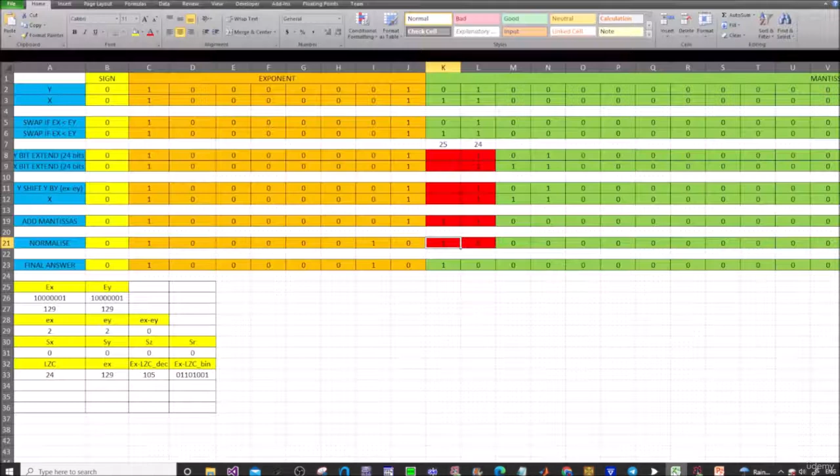So you'll note if you go into the resources section, you're going to find two files there. One of them is going to be an Excel spreadsheet. So you can go ahead and open that up just now, and you'll see it's simply the adder and subtractor. So if we get into the add subtract, you'll have seen this file before.

Now the other file in the resources section is a Logisim file, and it's going to have the circuit build for our adder. Now I had thought about building this up live in the videos, but having attempted it previously, it just takes far too long and you're not going to get all of the value out of it. So what I've decided to do is actually to build up the working model, and what we'll do now in this video is talk our way through it.

But first of all, let's go and we'll have a look at the Excel spreadsheet and we'll work out our little missing truth table. So let's use our old friends number 70 and number 5. And we can close this, so don't clear it, just press the close because we want to look at the data behind. So if we close that there, now what we're going to do is talk through the possibilities that we can have here, and I'll make it just a little bit bigger so we can see it a bit better.

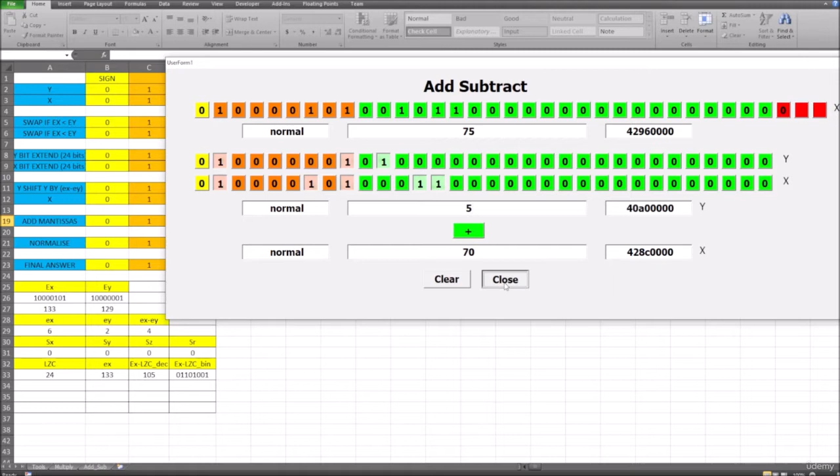So if we were to look at this example here, then we're going to have our value of 1 and 1 because both are normal numbers. But in this instance here, the value of our y is less than the value of our x. So it means that we're going to have to shift the value of y so that the exponents are the same.

So what we're going to do is we're going to take the value 1, 0, 1. In this instance here, it's going to be shifted to the right by this value here, which is our exponent difference. So that 1, 0, 1 is going to head off to 0, 0, 0, 0, and it will be 1, 0, 1. So it's shifted 4 places to the right.

So it means here in this instance that we're going to have a 0 there and a 1 there. And again, we're left with the two possibilities. Either we carry a 0 in from here, in which case that just remains as a 1, or we carry a 1 in from here, in which case we would have a 1 and a 1, and when we add those together, that would go to a value of 0, and we would carry a 1 through to the next value here.

So let's open up the Logisim file again. Now if you make sure you're on the top level here, you see that what we want to do is we want to add an input into here for X and also for Y, and also the add/subtract button. And we want the output to be the X plus Y. So if we head in here, you'll see that we've created the inputs here. So this is the input for Y, input for X. So I'll quickly show you these just so you can get started if you're building it yourself.

You can click on the input. We want to change that to a 32-bit input, and we'll face it east, and we're going to call that input X. So what we'll do is we'll put a tunnel. So here's your tunnel here, and we'll call that X, and we're facing it west, and we're going to make that a 32-bit tunnel, and we connect that onto here.

And now I've added a probe in the ones up here just so we can see it in hexadecimal as well. So there's your probe, and we'll face it east and make sure that the output is hexadecimal. We'll connect that up, and that's us created that X input. Now to create the Y input, you just Control C, Control V, and that's us now created a Y input. If we change this here to a Y, the label. Okay, so it means that you can quite quickly build up these little structures.

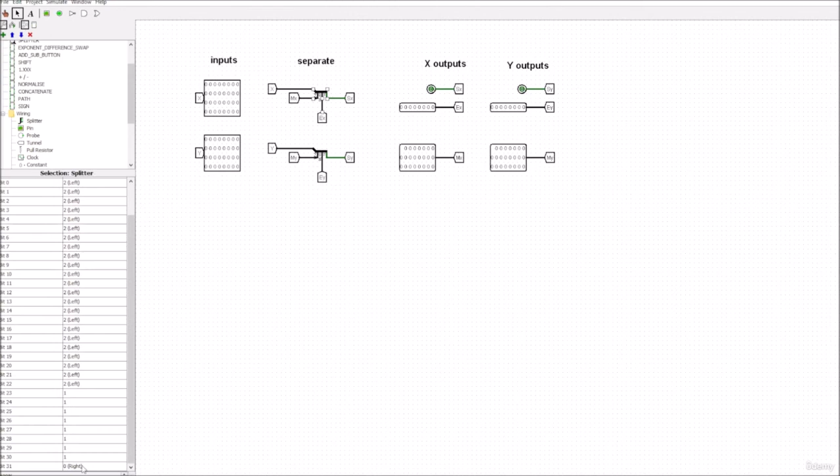And I can then change the values here, so they're the same as the values you have in this one here. So it means that the first lot here is 0 to 22, so that's the first 23 bits of the mantissa. The next prong here is going to be the middle one, the 8 for the exponent, and the last one is going to be the 31st bit, which is the sign. Okay, so that's how we split these things up. It's pretty straightforward. So if you like, we can think about the splitter as modelling lines 2 and 3 here. So in lines 2 and 3, we split the y value into sign, exponent, mantissa, and we split the x value into sign, exponent, and mantissa.

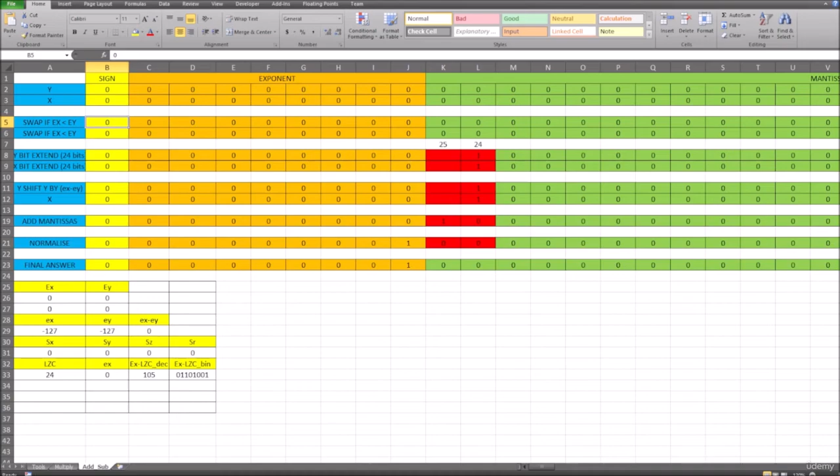Now the next section is going to be the swap section. So if the value for ex is greater than or equal to ey, we don't need to do any swapping. But if the value for ex is less than ey, then we're going to have to swap them round about. So the ex becomes ey, and ey becomes the ex. So let's have a little look at that here. So this is the component here, exponent difference and swap. So we're taking the sign, exponent, mantissa for x, and the sign, exponent, mantissa for y, and we're putting them into this box here. So I've called that exponent difference slash swap, so that's this one here.

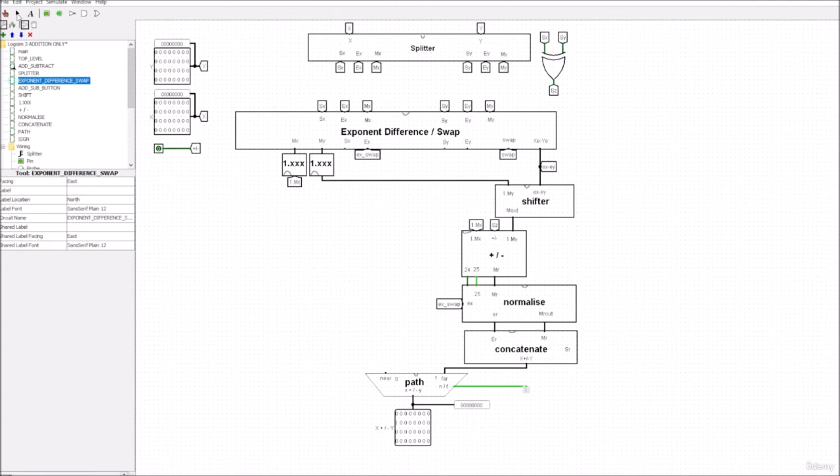So let's just head in and we'll look and see how we're going to build this. So we're going to have the inputs. So we're going to have the x input for the sign, y input for the sign, and we're going to have the x input for the exponent and the y input for the exponent, and the same for the x for the mantissa and y for the mantissa. Now what we want to be able to do is we want to see whether we have to swap the values for x and y. So we can take our x and our y and put it through a subtractor. So you get the subtractor down here, so we go to arithmetic and you'll see the subtractor here.

So whenever we subtract these off, this is going to be xe minus ye on this line. Now, if the value ends up being negative, then it means that the value for xe will be less than the value for ye. And that means that we're going to get this line here going high. So when this line here goes high, this tells us that we're going to have to swap these two round about, because we know that we want to keep the x greater than y, but if this goes high, it means that the value is negative, so it means that in effect y would have to have been greater than x.